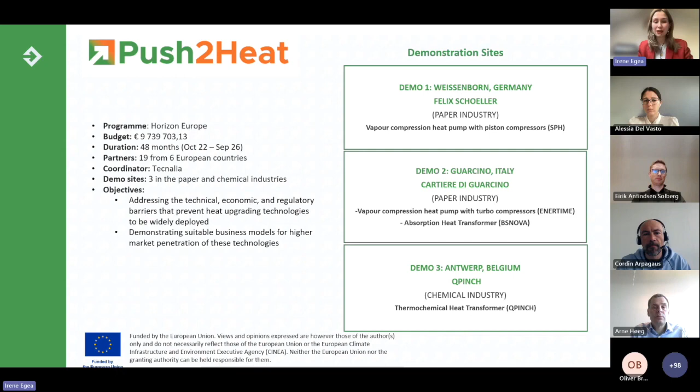The project currently has 3 demo sites. One in Weissenborn, Germany, in the paper industry, where a vapor compression heat pump with piston compressors will be integrated. Then we have a demo in Guarcino, Italy, also in the paper industry, with 2 technologies integrated there: a vapor compression heat pump with turbo compressors, and an absorption heat transformer. And then we have another demo in Antwerp, Belgium, in the chemical industry, demonstrating the thermochemical heat transformer. So that's PUSH2HEAT.

For Spirit, it's again a Horizon Europe project, actually the sister project of PUSH2HEAT. It will last 42 months, starting back in September 2022, so already a bit more than a year and a half. It has 17 partners from 8 European countries, and the coordinator is TNO. The aim is to enable industrial heat pumps to become the reference climate neutral technology for covering heat demand at temperatures up to 160 degrees by 2030.

It has 3 demo sites in the paper and food sectors. The first demo site is prawn processing in Norway.

The technology that will be demonstrated is the high temperature heat pump, ammonia and pentane in cascade. The second demo site is in sugar production in Belgium, and the technology to be integrated is the high temperature heat pump, pentane. The third demo site is a paper production in Czechia, and the technology to be integrated is the 4-cylinder piston compressor from Spilling Technologies.

Last but not least of the projects organizing this event, I'm talking about SUSHEAT, which will last 48 months. It's the youngest of the projects, I would say. It started in May 2023, and it has 14 partners from different European countries, including affiliated countries Norway and the UK.

I wanted to say a few words about EHPA. We are 24 years old, and we have 220 members across 30 countries, so not only the European Union, but also beyond. We have members from the UK, Turkey, Norway, and Switzerland, based in Brussels, working with the EU institutions, advocating for heat pumps, but also cooperating at the international level with the Chinese Heat Pump Association, the International Energy Agency, and so on.

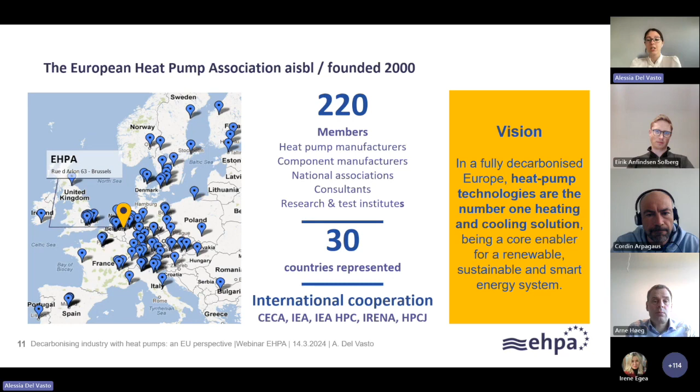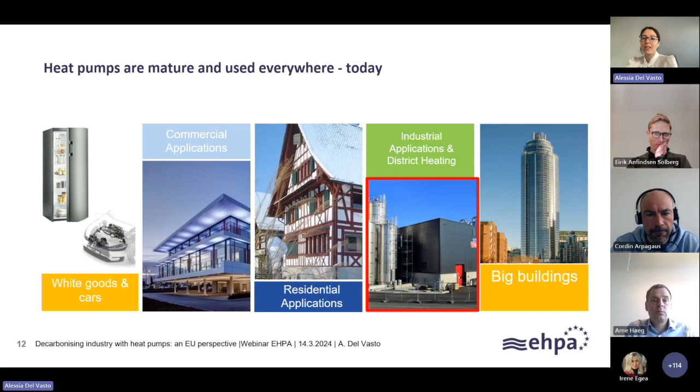So now everyone knows heat pumps are mature, let's say, and they're used everywhere, not only in white goods, not only in cars, not only in commercial applications, not only in office buildings, commercial buildings, residential buildings, but also in industries, also in factories and so on. And that's what we're going to talk about today.

We know they have reached quite high temperatures. It's soon 250 degrees, as my colleague Irene was saying. We have high temperature heat pumps that reach 200 degrees, very high capacity from 100 kilowatts to 50 megawatts. So it's pretty great and helps decarbonizing the industrial sector.

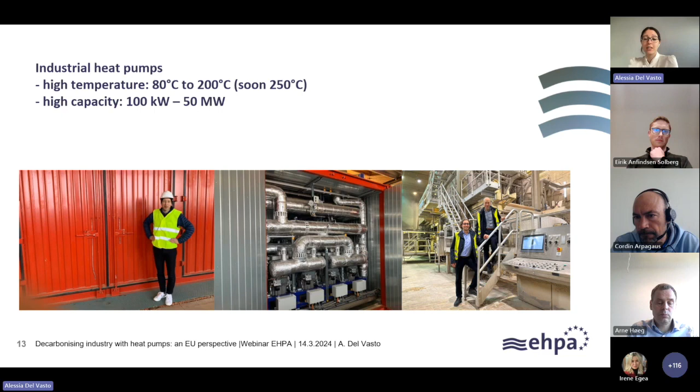Indeed, I was saying, we're gaining more and more momentum. Everyone is talking about it, not only researchers. There's of course a lot of focus from academics, but policymakers are getting more and more interested in that. The IEA wrote a report on the future of heat pumps, and the World Economic Forum recently published an article as well on decarbonizing the industrial sector in the EU via electrification. And of course, there is a huge focus on industrial heat pumps, on the role that they can have in decarbonizing the industrial sector.

As we know, industrial heat pumps and residential heat pumps in general work with an energy cycle. What we talk about here is that we need to close the energy cycle, and we need to make sure that waste heat is available in sufficient quantities and is actually reused in commercial processes. It's reused, it's not wasted, as the word says. It's used in new building, as well as in process design.

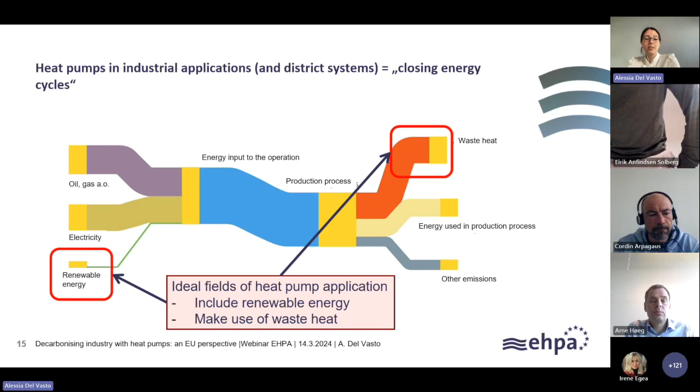When we talk to policymakers, whether at national level or at EU level, when it comes to industrial heat pumps, waste heat is taken into consideration, and it's finally seen as an opportunity. We'll see later what we mean by that.

Let's talk about what the European Union is doing with regard to industrial heat pumps. It's worth mentioning first the EU Energy System Integration Strategy, published back in July 2020. It was accompanied by a consultation with stakeholders, including the heat pump industry. The strategy clearly says industrial heat pumps can help decarbonize the low temperature heat supply within industries and can be coupled with waste heat recovery. There's a mention of waste heat, of course.

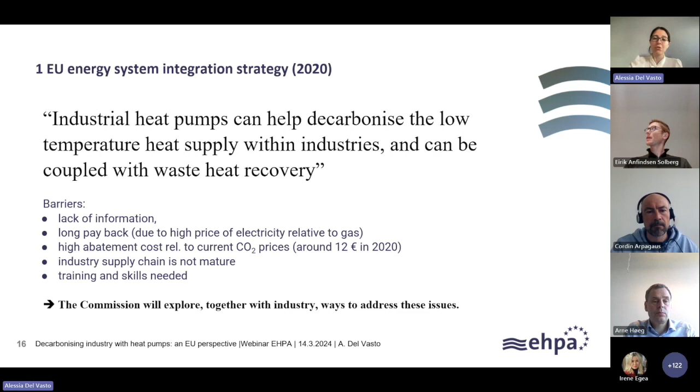The strategy also acknowledges a few barriers here and there: lack of information, long payback, training and skills needed in order to step up the rollout of industrial heat pumps. We, as EHPA, talked about training and skills a lot - about accelerating the rollout of heat pumps. But in order to do that, you need well-trained and skilled installers, or you need to carry out a few policies in this regard, one of them being making this job attractive to the population, to young people, etc.

One of the greatest recognitions for heat pumps, including industrial heat pumps, came last year with the Net Zero Industry Act. Heat pumps are recognized among the key clean technologies to carry out decarbonization in Europe. This was quite a big recognition, which also led to us handing over our heat pump accelerator report to the European Commission themselves.

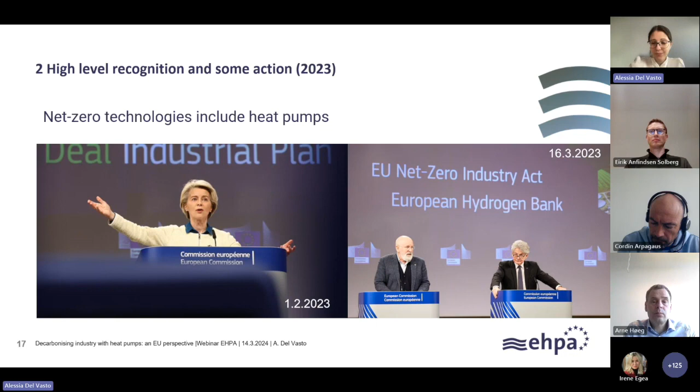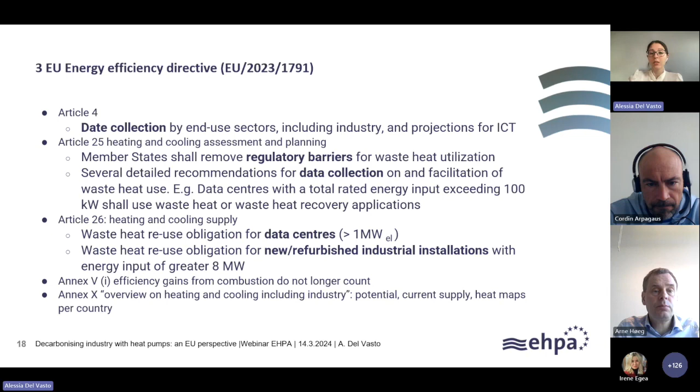It's worth mentioning as well the EU Energy Efficiency Directive, which goes a bit further and focuses on data collection by end-use sectors, including the industry. It goes to the planning - it says clearly that member states should remove regulatory barriers for waste heat utilization, etc. So it goes a little bit further, and indeed it was a step forward in recognizing the opportunity of waste heat recovery.

The Renewable Energy Directive created some kind of legal framework at the EU level for the development of clean energy all across the EU economy. The EU really wants to be a global leader in developing renewables. Right now, in 2022, the share of renewables was around 23%. The goal is to bring it to 42.5% by 2030.

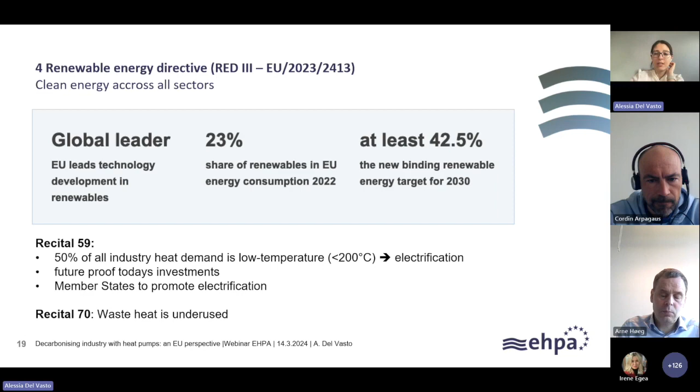In the recitals, it's mentioned the opportunity brought by industrial heat pumps - how they can help decarbonize the sector, at least when it comes to low temperatures below 200 degrees. Member states are invited to promote electrification via industrial heat pumps, and once again it's said very clearly that waste heat is underused. Its role in a wider framework is to mainstream renewable energy in industry, but also, in Annex 4, it's clearly said that training should be adapted to the requirements of industrial installations.

As we were saying, this is key in order to carry out the rollout of industrial heat pumps. It's clearly said once again that we should replace fossil fuel use for industrial heating with renewable energy, and of course with industrial heat pumps when possible. The directive also mentions that member states should track the progress done in this regard in specific reports that are handed over to the European institutions, so that we can see what went wrong, what went right, and track the progress for every member state.

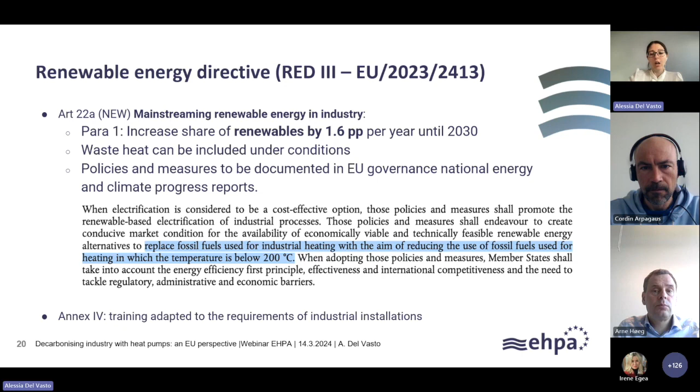Now it's time to talk about the F-gas regulation. Let me talk about it for a few minutes, because it's particularly relevant at this stage. You probably know the F-gas regulation was published at the end of February and came into force this week on the 11th of March. So indeed, it's quite relevant - everyone is talking about it.

There are a few aspects that have been clarified. A few others have not been clarified yet, and will be clarified through implementing or delegated acts throughout this year, probably even before the summer break. We, as EHPA, are closely monitoring these developments on the F-gas regulation.

What's new in the F-gas regulation? The HFC phase down is steeper than in 2015, and the objective is to reach zero HFC by 2050. The EU has to reach climate neutrality by 2050, so this should be read as: eliminating HFC is seen as an objective by the EU in the wider framework of climate neutrality. There are new prohibitions, of course - we will look at them in a minute.

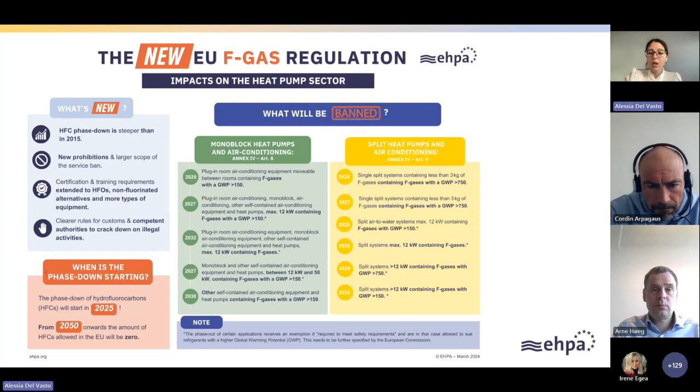We have identified a few barriers already: knowledge and trust, the lack of infrastructure, and the fact that complex integration is particularly relevant, integrating energy carriers with key technologies, etc. That's particularly important as well.

But what I want to conclude this presentation with is electricity price. We really believe that at this stage, the price ratio between electricity and gas must absolutely come down. EHPA specifically calls for the price of electricity to be no more than double the price of gas.

We support carbon price and policy instruments that in general shield citizens from electricity price spikes. We need to make sure that for industry, citizens, and consumers, heat pumps become a rational choice from the economic point of view, and reduce the electricity and gas price ratio, but also reduce upfront costs, boost financial tools to reduce such upfront costs, and make it easier to access loans, green loans, renovation loans, subsidies, etc.

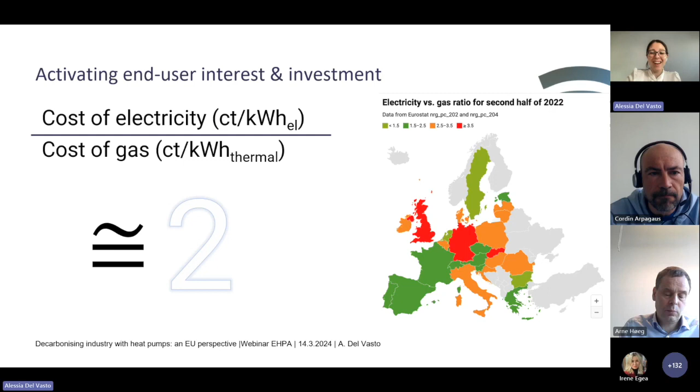We have identified barriers, but we also offer solutions. And I'm always here to help answer your questions, whether during this webinar or beyond it. Once the webinar is over, you can reach out to me at this email address. Thanks a lot.

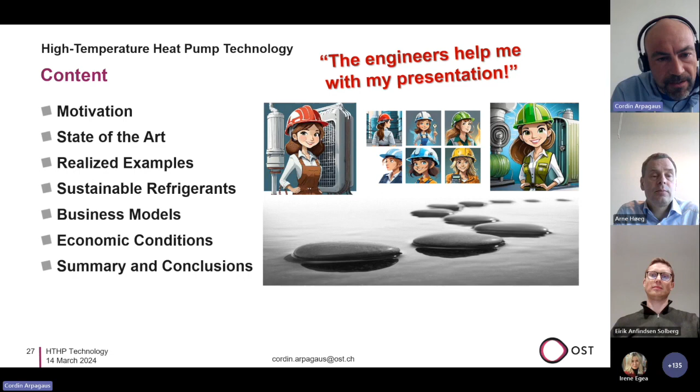An announcement: next week on Monday we will have a steam generating heat pump webinar organized by our university. If you are interested to join, just do it. It will be very comprehensive presentations there.

The motivation for industrial heat pumps or high temperature heat pumps is coming from the energy demand. A lot of energy is required for process heating, divided by the temperature levels, as we have seen before. It's the low temperature range below, let's say, 200 degrees.

That is interesting for high temperature heat pumps to upgrade waste heat to higher temperature. For higher temperatures than 200 degrees, there will be some other technologies, some other renewable energies used. So the focus is on that lower part, around 37% of the process heat. Heat pumps are a key technology to decarbonize industrial process heat.

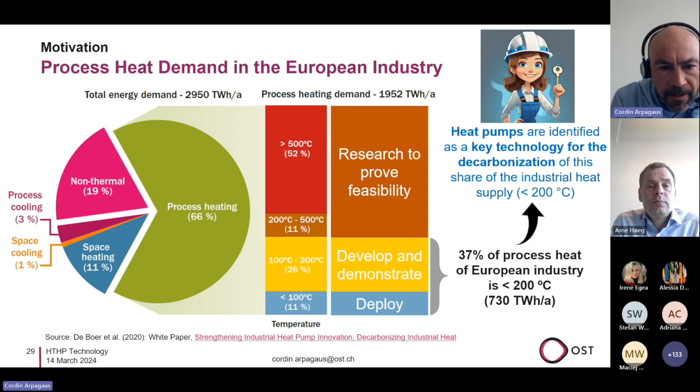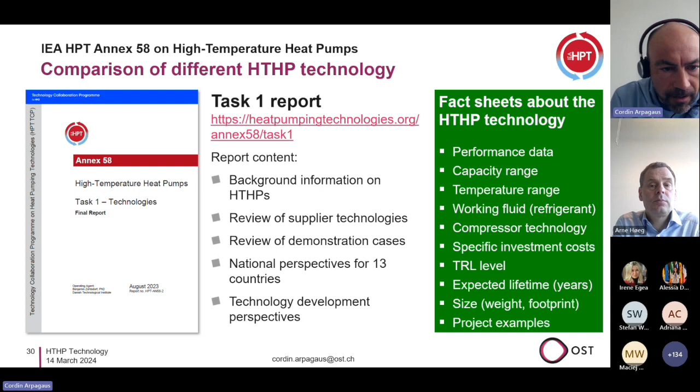Just as an important fact, we have IEA Annex 58, where we participated as a Swiss university. Several countries participated, and we are developing task reports. The first task one report is about high temperature heat pump technology. This report is available for downloading, with very valuable information, and I will use some of it for today's presentation.

I generated this slide as an overview of many heat pump suppliers now active in this market. The left graph illustrates the temperatures that can be achieved as a function of heating capacity, and in color the compressor technology. You can see these products or machines are providing heat higher than 100 degrees.

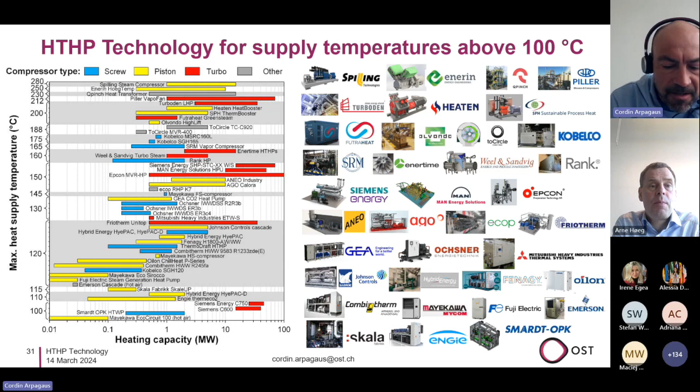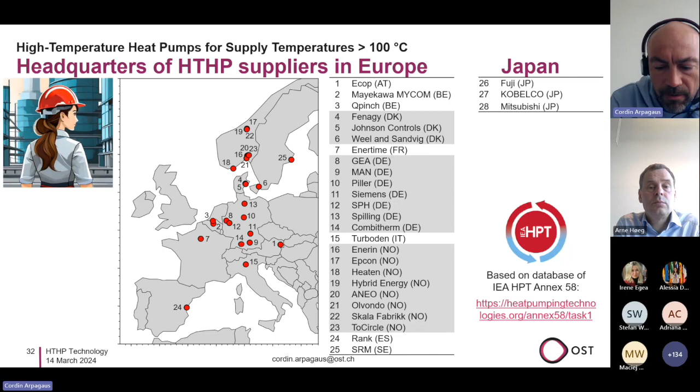So up to 280 degrees probably, when we include vapor recompression technology, open cycle heat pumps. The message here is the market is evolving - I would expect probably 5 new companies every year. The companies are located in different places with headquarters in Europe, mainly in Norway or Germany and some other countries. For sure there are others around the world which were not participating in this Annex project.

Important is the technology readiness level as a measure of the maturity of the technology. For high temperature heat pumps, we also see a distribution of products in these technology readiness levels - readiness level 7, 8, 9 is very close to commercialization. Here the heat pump suppliers are pushing their products towards higher TRL level.

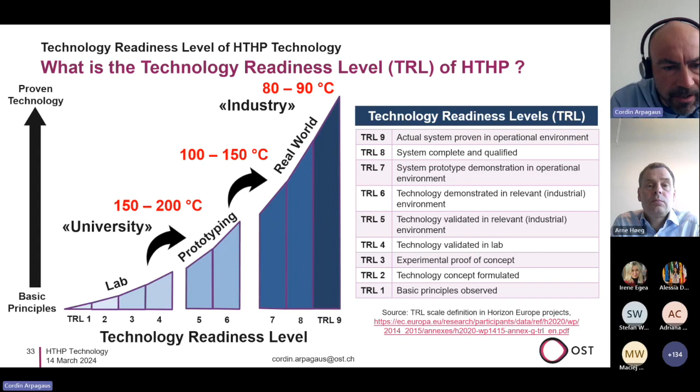Here is a table from this Annex report structured by company name and then by TRL level. You see on the right several which are already commercialized, so we would expect more and more in the next years. We have 23 market available products, 7 prototypes, and 3 in lab small scale prototype stage. There are other suppliers here on the left and right which also provide industrial and large scale heat pumps.

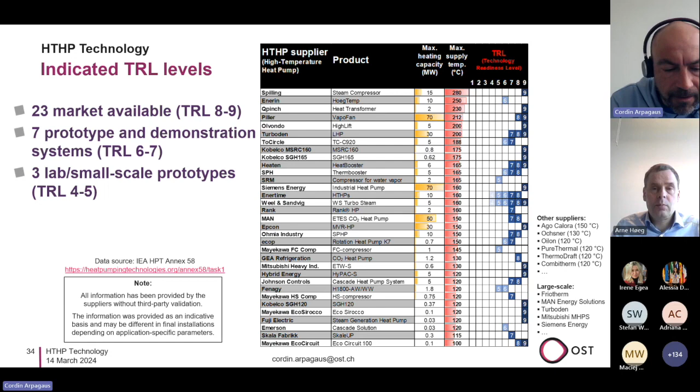Important for an end user is the operating map. Here we have some of these operating maps illustrated as a function of heat source temperature and heat supply temperature. You can see there are several products which can provide, let's say, 120-degree heat from waste heat of 50. So here you have quite an overlap of operating maps, which is an interesting spot and an interesting range for various applications.

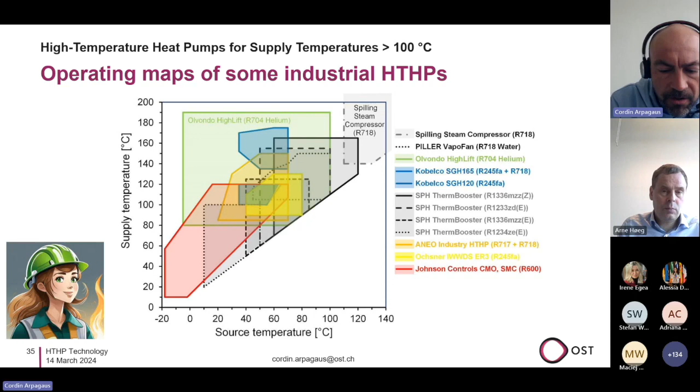I have now 2 or 3 companies I would like to focus more on. Enerin - we have Arne later on with a presentation. The interesting thing of the HoegTemp heat pump is that it is working in a Stirling cycle with helium as a refrigerant. Helium has the advantage that it is a noble gas with no problems for the environment - no ODP, no GWP. So this technology is close to market.

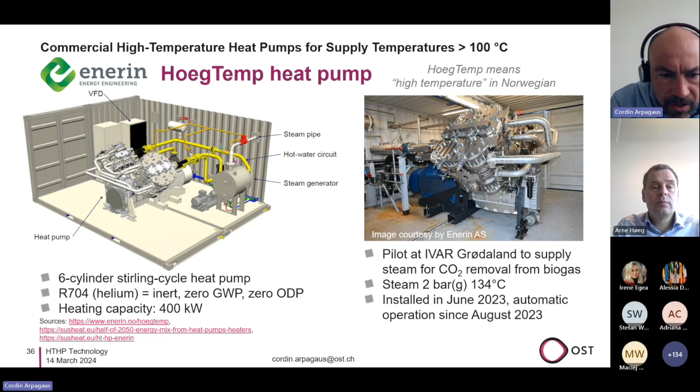On the right you see a demo pilot installation in Norway to remove CO2 from biogas. They need steam, so this machine is producing steam at about 2 bar gauge, 134 degrees, and it is now running and in operation.

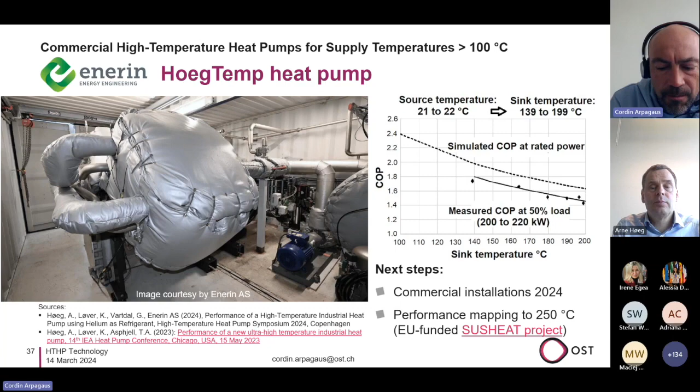On the right you can see some COP data, and here another advantage of this heat pump: it can achieve very high temperature lifts between source and sink. This data is from 21 degree source temperature up to 139, so over 120 Kelvin lift, and still the COP is in a range of 1.8 to 1.6.

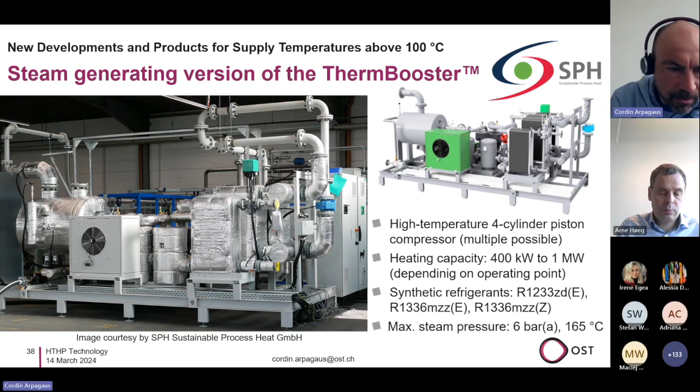This company is SPH, Sustainable Process Heat in Germany. They provide a steam generating heat pump called ThermBooster, based on a piston compressor, 4-cylinder, with a quite modular design to fit different heating capacities and temperatures. The refrigerants can be selected between HFOs, but also hydrocarbon refrigerants like butane or pentane. So this is a heat pump that can generate steam.

The source is the waste heat or humid exhaust air from a dryer, from the paper machine dryer. It is then upgraded to steam, low pressure steam at 2.2 bar absolute. The capacity is over 1 megawatt. So a very interesting setup.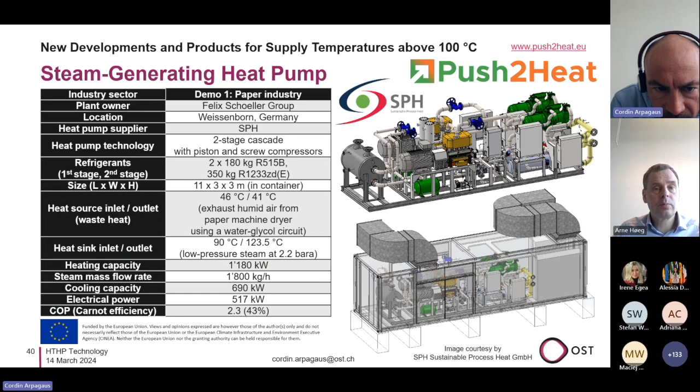What you can see on the left here of the SPH heat pump is the steam condenser, and the steam generator or condenser is from Vahterus, a Finnish company. You can see here the design. It's a plate and shell heat exchanger where the refrigerant goes in from the right, is condensed, and comes out again on the right.

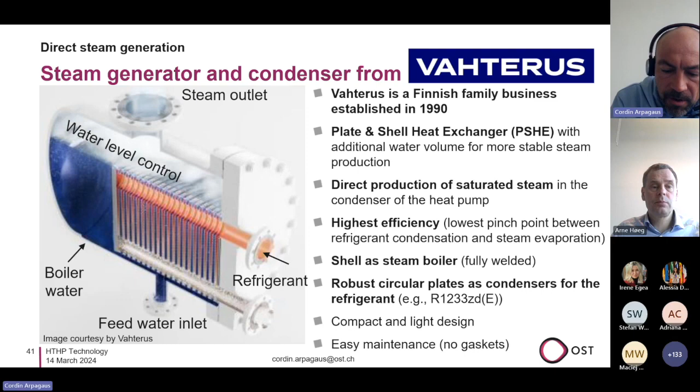The feed water or water inlet is from the bottom, and it is heated up and then evaporated to steam. So there is a water level control, and the shell is the steam boiler in this equipment. It's quite a robust design. We'll see probably many applications of this plate and shell heat exchanger in the future.

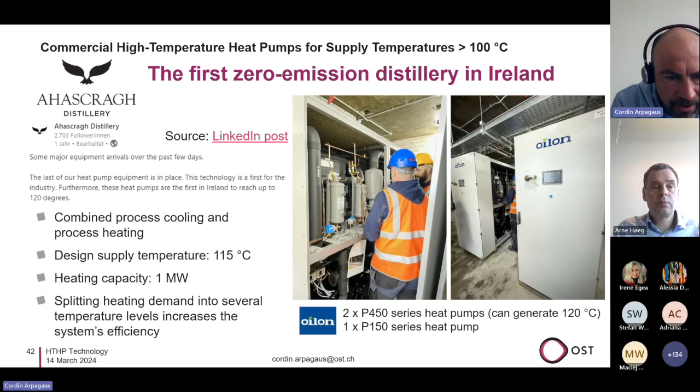In Europe, there are some realized examples of high temperature heat pumps. This one is in Ireland, a distillery which is using a heat pump to generate heat, going up to 115 degrees. It's from Oilon. Actually 3 heat pumps are installed, 2 which can go up to 120 degrees, but they also did energy analysis and optimized the temperature levels for their processes to increase the efficiency. Capacity is also in the 1 megawatt range.

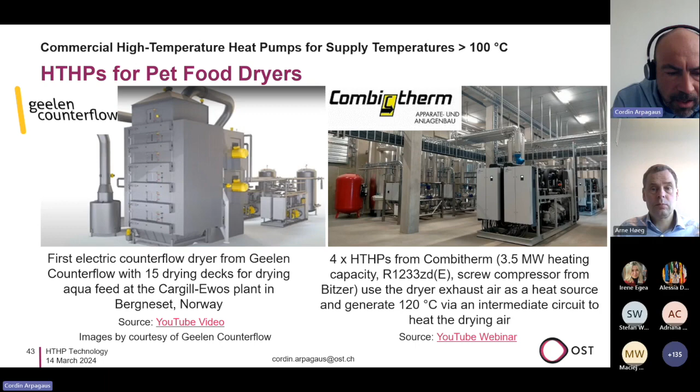So using the exhaust air as a source. A typical application for drying, using that humid exhaust air as a source and upgrading it to higher temperature inlet air for the drying.

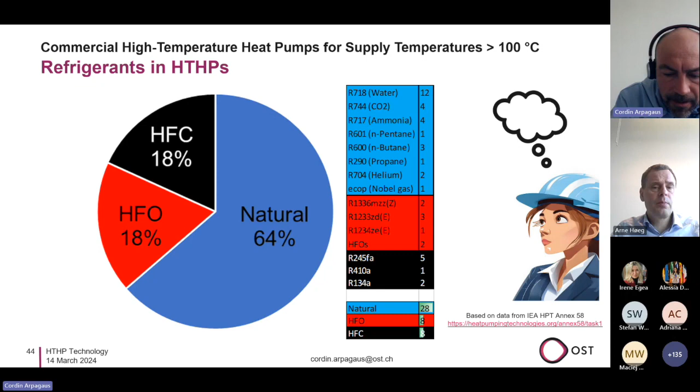From the refrigerant point of view, we see a trend towards natural refrigerants, where we would also count, for example, helium. But there are the hydrocarbons, ammonia, water, CO2, and then the HFOs in red, which still have application, and in the next years there will be several heat pumps using this refrigerant. The HFCs need to be replaced probably by HFO refrigerants.

So we go to steam applications. It could go down to probably 70 degrees, 80 degrees as a starting point, so below 1 bar absolute pressure. Then the compressor or the valve has to be vacuum tight or airtight to operate properly.

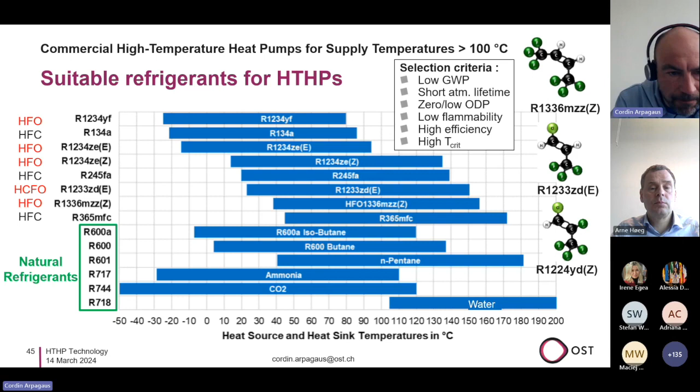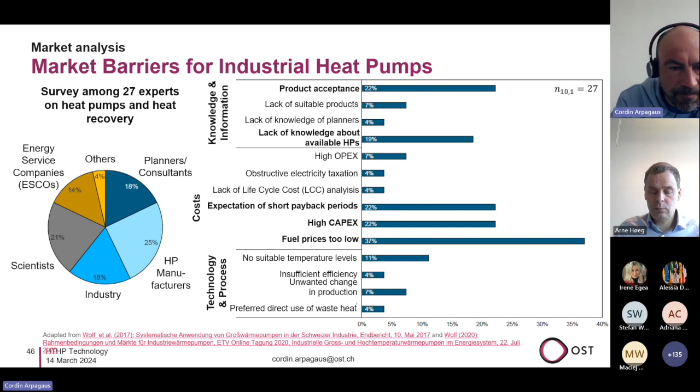Product acceptance is another important barrier. End users need to be convinced that the machines are reliable, and they need a demonstration that this works. So from market adoption with industrial heat pumps, we are still at a very low percentage—maybe 1 of 100 companies, 1%, has an industrial heat pump so far. So there is a big need to push this technology to higher adoption.

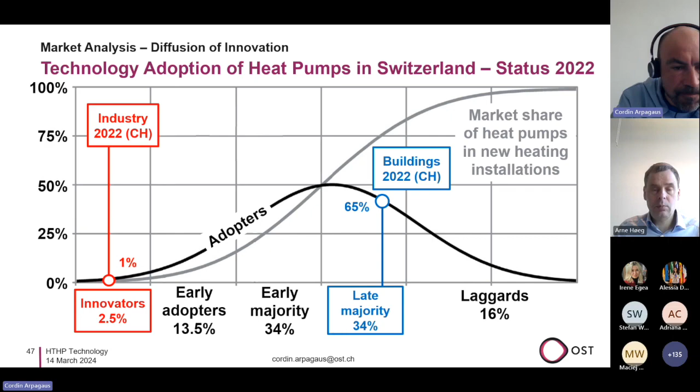Subsidies and funding programs are in place in many countries to push this technology. In blue, you see the heat pump adoption for residential heat pumps in Switzerland, and you see it already reached 65%, so it's over the majority. This is state-of-the-art technology for heating houses. In industry, there is still a lot of work to do.

For business models, we did a survey among 16 heat pump manufacturers for high temperature heat pumps. What you can see is that customers typically want to purchase the heat pump, meaning they want to own it as equipment. Energy as a service, or heat as a service, may be interesting in the future where such concepts exist, and also leasing could be interesting. But direct to customer is at the moment the most important business model.

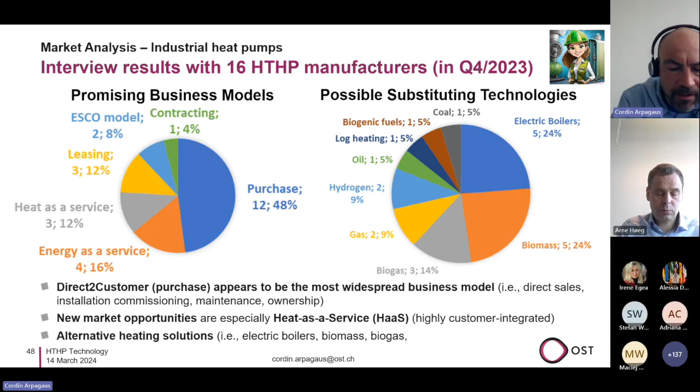Then there are other technologies in competition with heat pumps, especially electric boilers or biomass, biogas, and some other technologies. This has to be taken into account, especially when evaluating the economic situation.

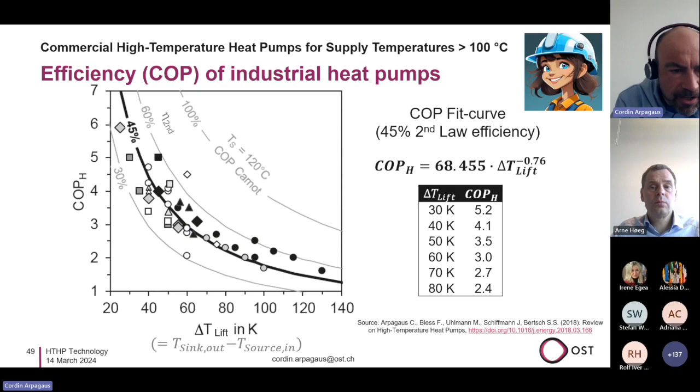The COP, the efficiency, is clear—there is a relationship between the temperature lift and the COP. If we go to very high temperature lifts between sink and source, we would reach a COP of 1, which is in principle an electrical heater. So the temperature lift needs to be in a range where we have a benefit from the heat pump, a COP of 2 or 3. The application needs to be suitable for a heat pump.

Market attractiveness: this graph shows the relationship between economic temperature lift and the price ratio of electricity to gas. The lower the price ratio—meaning gas is expensive and electricity cheap—the higher temperature lifts are possible while still being economic compared to a gas fossil fueled heating system. It just illustrates the relationship. For different countries there are different ratios, and it's possible to place countries on this curve.

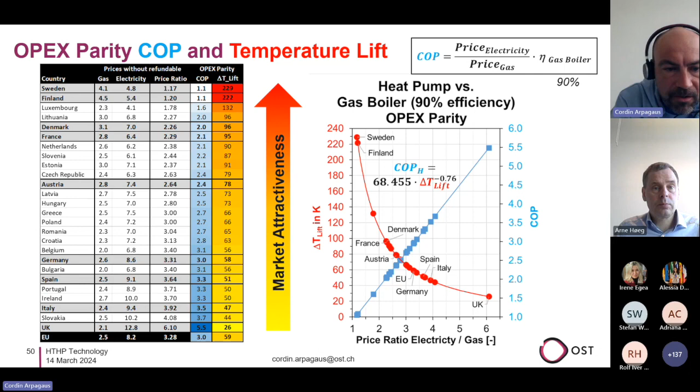Scandinavian countries have a very low price ratio, so heat pumps are a very attractive technology there. But in the UK or other countries with a high price ratio, only a temperature lift of maybe 40 or 30 Kelvin is economic. The goal should be to push this towards the left.

Economically, we have different input parameters that influence the payback for a heat pump. Here you see a sensitivity analysis: electricity price is important, as is the temperature lift—so the COP or the application—then the cost factors for planning and integration, and so on. On the other side, the gas price and also the operating time are important parameters. It's better to run the heat pump more hours than less. I think this is very clear.

The influencing parameters are there. It's just a question of the local situation of that end user, and especially also the investment costs for the heat pump and the whole project.

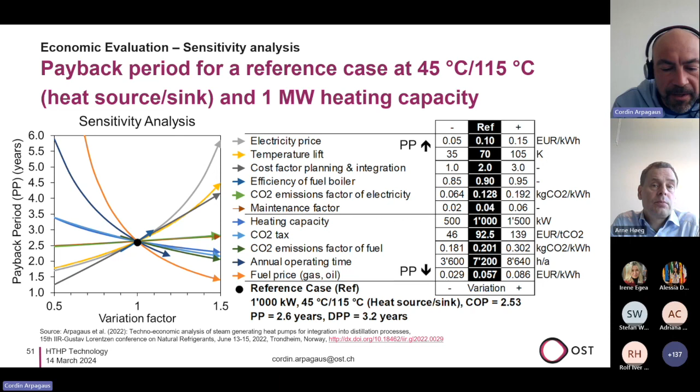As a summary: altogether, here we have many products—we have seen that from the IEA Annex 58 project. Several heat pumps are very close to market and some already commercialized. As application examples, we have seen some realized cases that generate steam, hot air, or pressurized water.

The economic situation depends strongly on the price ratio, but also on the temperature lift. It needs to be a suitable application for a heat pump. There are some countries where these conditions are more favorable than others in Europe. From the business models perspective, purchase is very often seen, but in the future heat as a service could also be attractive. From the refrigerant point of view, as we've seen, F-gas regulation pushes refrigerants towards natural refrigerants or refrigerants with very low GWP.

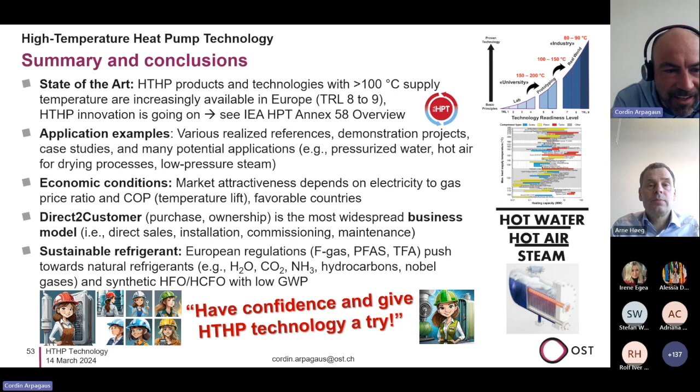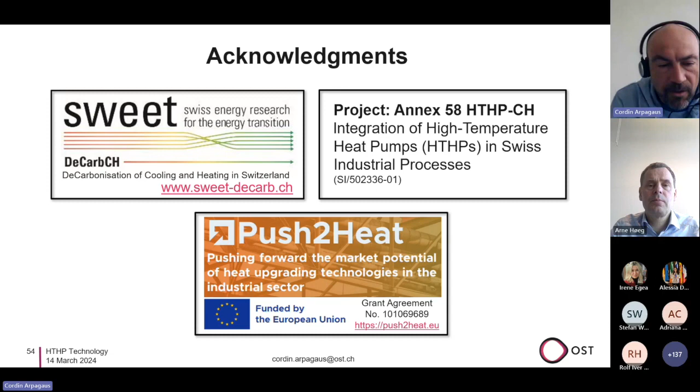So finally, I hope that you have confidence in high temperature heat pump technology and give it a try. I'd like to acknowledge three projects in Switzerland: DeCarbCH, about heating and cooling of Swiss industry; Annex 58, mentioned before; and PUSH2HEAT, the European funded project. Thank you for your attention.

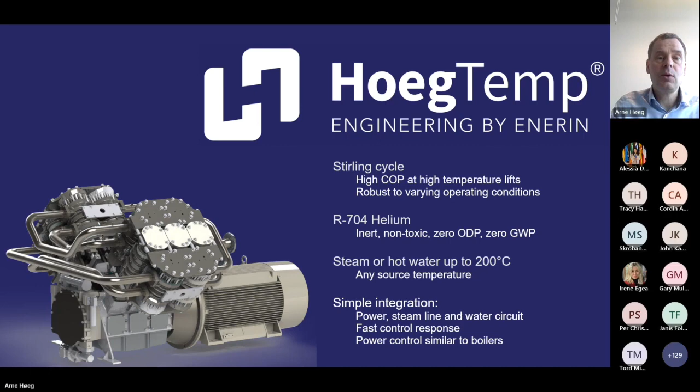Basically, power in, heat source in, steam out. We can also deliver hot water directly or thermal oil instead. So it's one process, one refrigerant for any temperature range. That means if the customer has a 170-degree hot water circuit or an 8-bar steam system, if in the future they find they can lower the steam pressure or the temperature, the heat pump will still be able to deliver the same amount of heat, but with better efficiency. So there's no need to wait for the next redesign of the plant to go for a heat pump. Just add the heat pump and do the changes in the plant later.

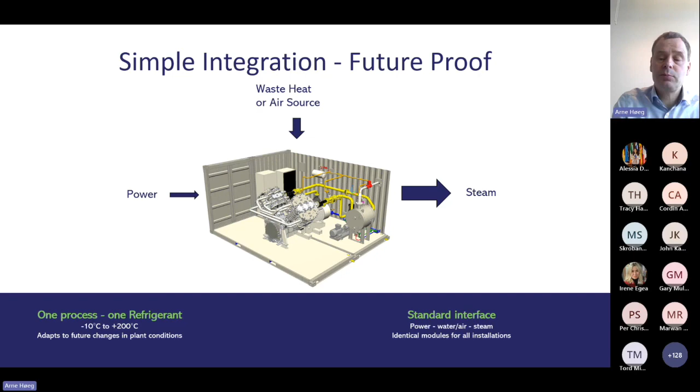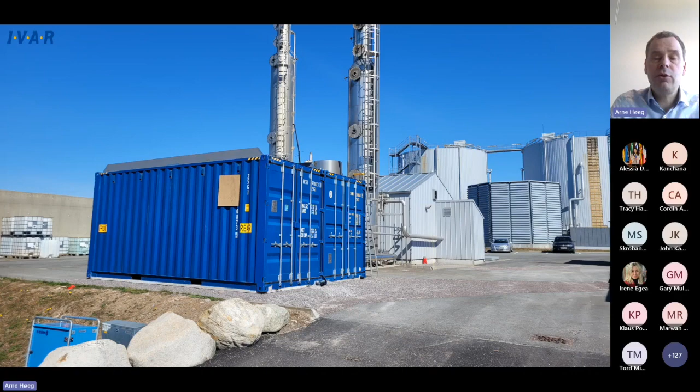Here you can see the first installation from the outside. This is a biogas facility. You can see the anaerobic digesters in the back and the CO2 capturing system in the middle, and the heat pump in the container here. So it's possible to deliver for brownfield applications and installations.

I won't spend too much time on this one other than to say it's a piston compressor with integrated heat exchangers, so a very compact design.

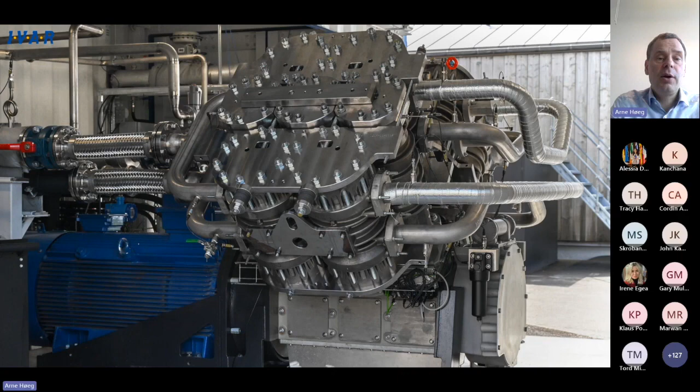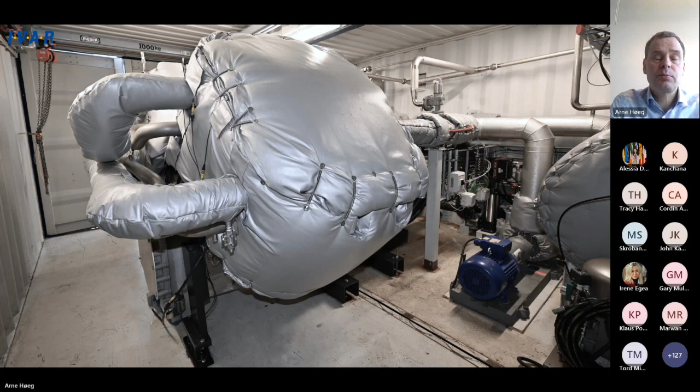I'll also add an additional benefit when replacing oil and gas with heat pumps. One thing is the factor of maybe 3 in energy consumption, but the other is that you also reduce the strain on the energy system. Many plants are constrained by the cooling system or waste heat circuits, so probably in the summer the capacity can be affected by those constraints. So adding a heat pump, you not only save energy, but you reduce the strain on older systems in the plant, and you will also be insured against high gas prices.

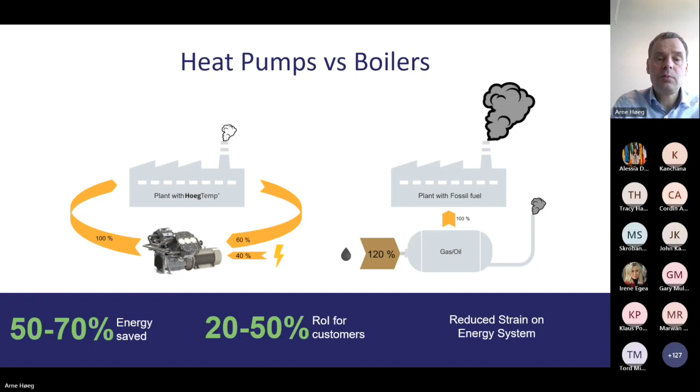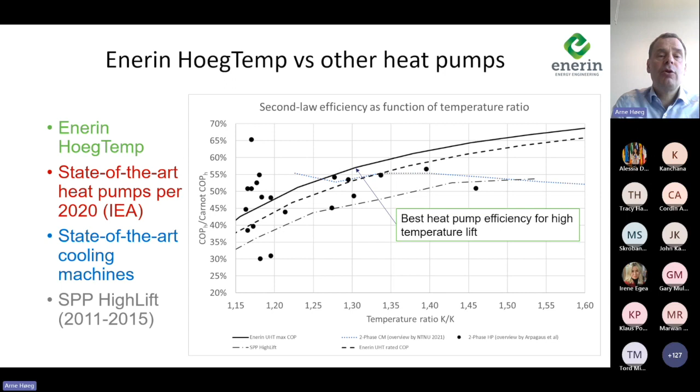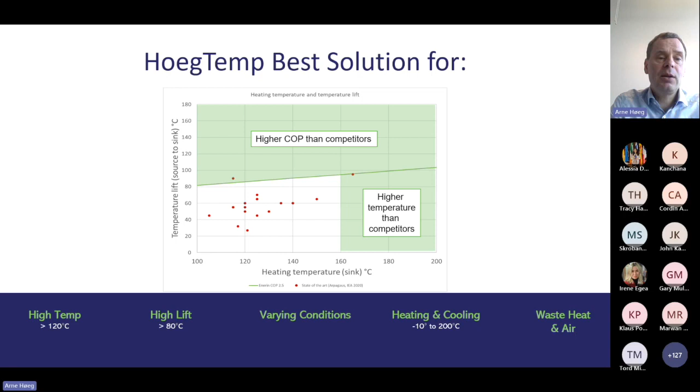Going into the efficiency, we have the COP obviously, but looking at the Carnot efficiency, we see that especially at very high temperature ratio in kelvins, the HoegTemp heat pumps will be more efficient than other heat pumps. That's especially interesting for the next frontier with very high temperatures. Summing up, the HoegTemp heat pump technology will be the best solution for very high temperatures and high temperature lifts, but also for varying conditions. Not all companies and plants have stable temperatures and energy consumption, so if the conditions vary, this type of heat pump will also be a very good alternative in the low range with higher COPs.

At Pelagia Måløy, we will be installing 1.6 megawatts of high temp heat pumps. The first step is 400 kilowatts this spring, and we'll then build out to 1.6 eventually.

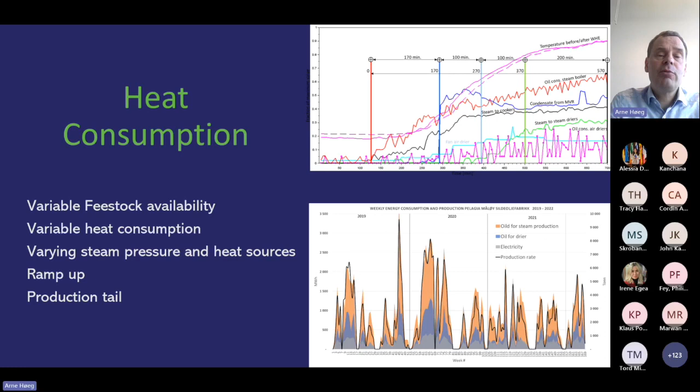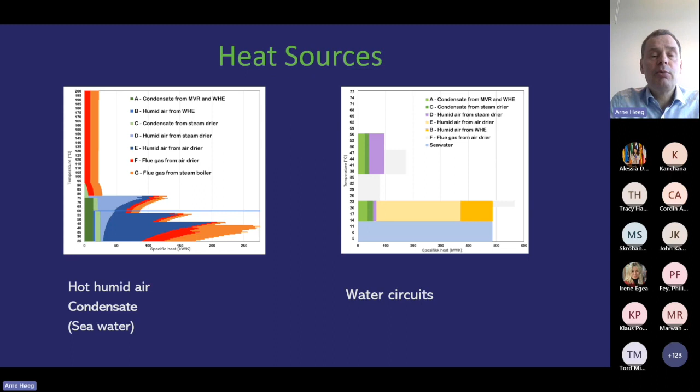When integrating this heat pump into the plant, we looked at the energy flows and everything. We have a very good tool to monitor energy use. We looked at the energy demand here, which fluctuates quite a lot, and also during ramp ups all the different flows and machines are turned on so nothing is very stable. Also, the heat sources are at different temperatures and levels, and we found that the average Carnot efficiency will typically be 50 to 60%.

So we had to do a pinch analysis. We do a dynamic pinch analysis so that we can watch how the pinch point fluctuates from minute to minute. We have built a digital twin of the plant, and then we can see how best to integrate the heat pump.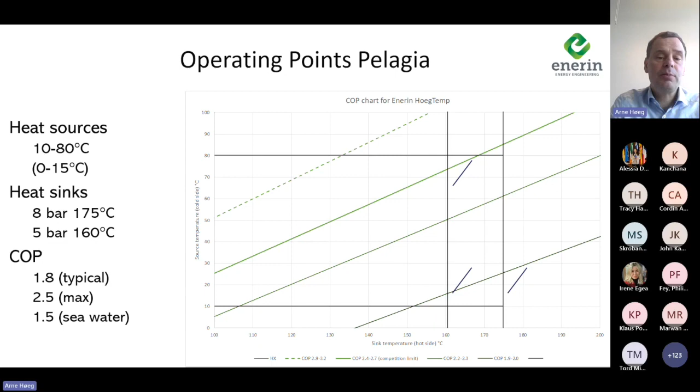And then between, or at ramp up, we can utilize maybe cheap electricity to also use the low COP values there. So this is more or less what it will look like. It's a 12-cylinder heat pump, and it will be something like this, and then the next one will be beside it in the machine room.

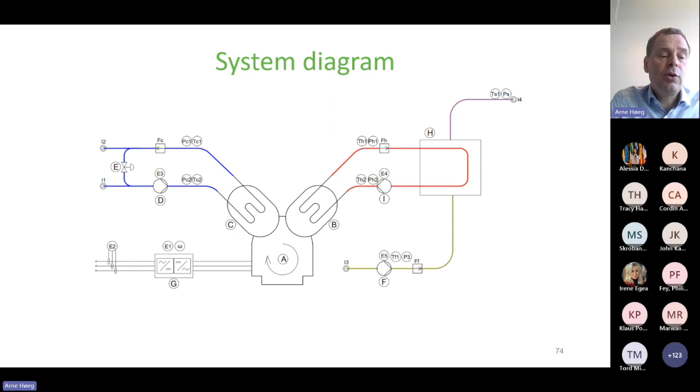No oil degradation, because if you look at this schematic of the heat pump, we only have oil lubrication for the mechanical components here, and we have a very, very efficient piston rod seal that keeps the oil below the piston rod seal. We have a completely dry process in the heat exchangers and everything. The capacity ranges from the smallest module, 200 kilowatts, to the largest module, 1 megawatt. So the heat pump that we will install here at Pelagia will have a maximum heating capacity of 1 megawatt.

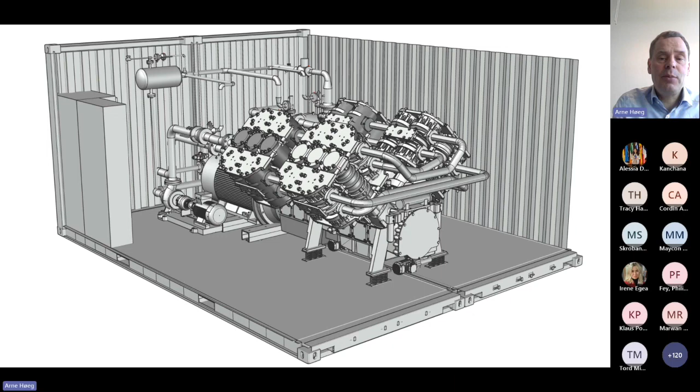It's very silent. I mean, it's no problem to speak in a normal voice beside the heat pump when it's running at full power. This isn't a high-tech sound measurement, but it reads 79 decibels here, and you don't really hear the heat pump, because what you hear is the fans from the frequency converters and the pumps and other noises in the machine room.

Other than that, it's approximately 1 million euros per megawatt, that's the standard price. And then we have operating contracts, and they start at approximately 1 euro cent per kilowatt hour of saved energy. That's more or less the typical level. That means in most markets with high gas prices and low electricity prices, or if you're able to utilize storage so you can use cheap, abundant renewable energy, then a 3-year payback should be entirely possible.

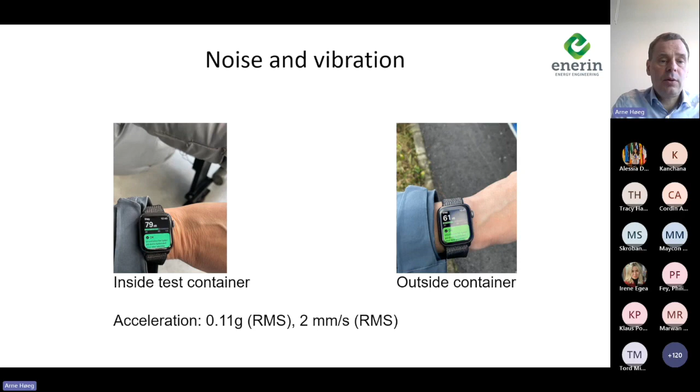So to sum up, we have the technology to decarbonize the industry today. I think we meet most of the barriers that people see.

There was a question about staffing. We are 10 people at the moment, interviewing 2 more to hopefully start before summer. That will make 12 employees, and we plan to recruit more later this year.

The heat pump is single stage, so it's all ideal gas. It's one stage regardless of the temperature lift, which is why we can achieve a very good Carnot efficiency at high temperature lifts. The heat pump does everything in one step.

Thank you very much for the introduction. As Irene mentioned, I work at Pelagia, and we are working very hard to reduce the energy input of our factories. A little bit about Pelagia.

We are a leading producer of pelagic fish, which is mackerel, herring, blue whiting, and others. We have headquarters in Bergen, Norway, where I'm located now. We have around 25 production facilities, mainly in Norway and UK, but also presence in Denmark and Ukraine.

In Norway, we have a yearly CO2 emission of around 52,000 tons, which we would like to reduce.

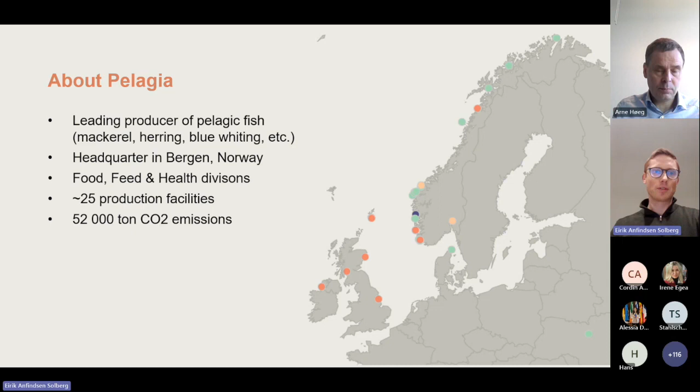Our key products are food for humans, that could be fillets or frozen fish. We have a feed department that produces fish oil and fish meal that goes into animal feed, mostly to the salmon industry. We also have a health department which produces omega-3 oil for pharmaceutical and nutritional industries.

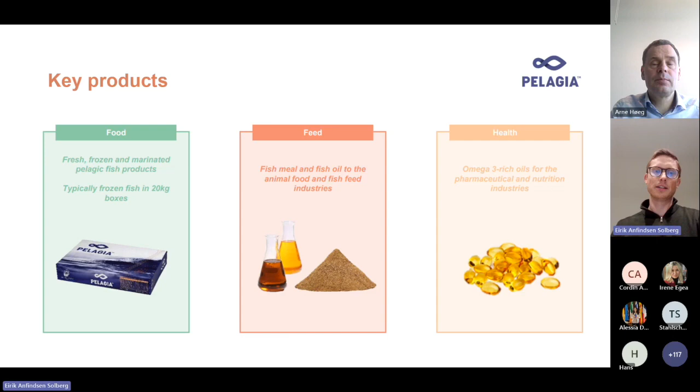Since we are a big energy consumer, at least the feed industry uses the most fossil fuels, we have continuous and increasing focus on energy in Pelagia. We also have different factories of different ages, so we have different things we can do, like optimizing operation and cleaning routines for equipment. These are easy things to do. We also have different types of fuels and energy at our different facilities, so we need different strategies at every plant.

We also try to exchange experience between our factories, and also, like we talk about today, contribute to innovation and facilitate industry trials at our plants. So we are contributors in several projects on heat pumps and energy, both in Norway, but also EU projects like the SUSHEAT project that we are here on behalf of today.

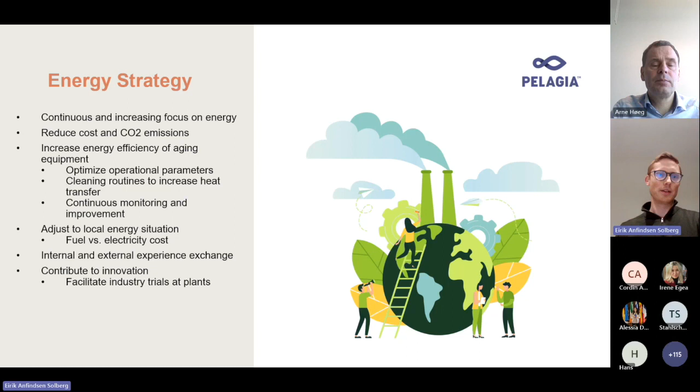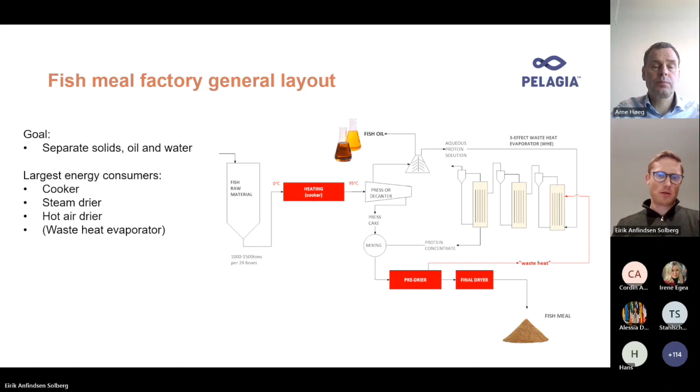Since we have a lot of waste heat from many of our processes in the form of steam from our dryers, we have surplus steam from our dryers. This will be used in the heat pump system, and we also have dirty condensate from cookers and dryers, both dirty and clean, from the dryers and waste heat evaporators. This will also be used in the heat pump system.

So we are at Måløy. We are currently installing systems from two different contractors, that is Aneo and Enerin that Arne presented just now. The reason we have two different vendors is that they are different systems with different temperature lifts, so we use the correct technology for the energy lifts that we need. For the smaller energy lifts, we will use the Aneo system, and for the larger energy lifts, we will use the Enerin, to get the best COP that we can in total.

So the way it works is that we have dirty steam from the dryer. That is steam from the fish that has evaporated. We take this into a heat exchanger, that is actually a steam heat exchanger, so we get out clean steam on this secondary side. This is vacuum steam at around 80 degrees or so.

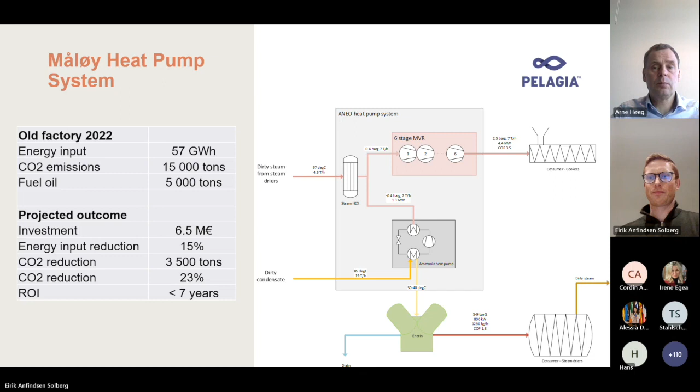So in the future, like Arne said, we are starting with one Enerin heat pump, but we have the space to build out with several more if it turns out to be a success. Then we will be able to produce steam for more of our dryers. We do not have enough waste heat, we're basically using all our waste heat today, so we will have to introduce seawater as a heat source for the next heat pumps.

Together with SUSHEAT, they are using our factory data that we have provided them with, and they are looking into simulation of control systems and machine learning algorithms to optimize the production in our factory. In SUSHEAT, there's also looking into storage of energy.

Since our factories are, like Arne showed in the graphs, we don't have a consistent, what you call, stable energy usage. We have to use the energy when the fish arrives, so we are ramping up and shutting down production many times a year. And that would be a very good place to test out thermal energy storage as well.

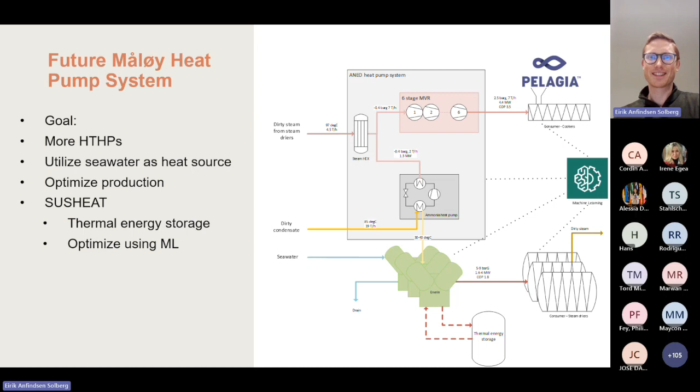Yes, thank you. Thank you very much, Eirik. And of course, we also hope it will be a success. So now, before we start with a very brief Q&A, because we are running out of time practically, I wanted to ask you all, what's your energy level as of now? I'm just going to launch a poll, and you're very much welcome to just share with us how you are feeling.

I see the energy level is pretty high. That's great. I mean, weekend is coming very soon, so I understand. But okay, so I think we can start with some questions, as I said, we don't really have that much time, but I think it's a good opportunity since we are all here.

I wanted to start with a question for Cordin. I wanted to ask you again, you briefly mentioned barriers, but it's always interesting to hear what are the main barriers, but also the main drivers for the market introduction of high temperature heat pumps.

Yeah, this is a very good question. We have seen the barriers in several presentations. Once we have seen this about prices of gas and electricity, then the reliability and availability of such heat pumps in realized examples. Then we have seen the training and the skills of the installers, so we need a lot of people that are trained on these systems. And the benefits, it's all about decarbonization, electrification, saving energy, CO2 reduction. This I would mention here.